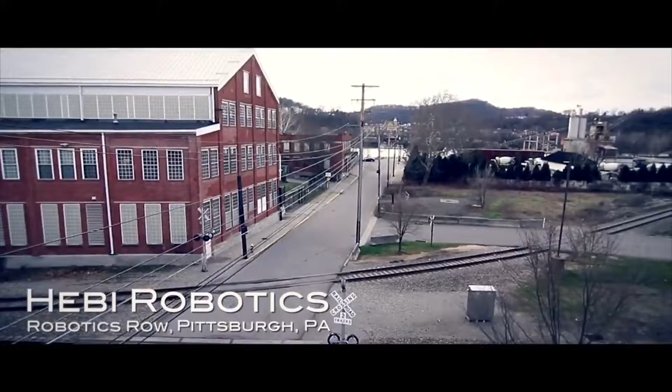My name is Howie Choset. One of my motivations for participating in the start of HEBI Robotics was to keep the band together. And in 2014, we started the company.

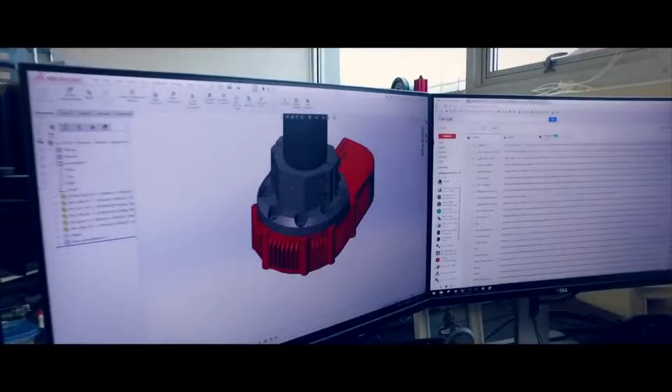I was introduced to HEBI as I was pursuing my MBA at Carnegie Mellon's Tepper School of Business. I became employee number one after the founders. We're known as the Snake Lab because the thing we're most known for is making snake robots. And in the process of making these robots, what we wound up doing is making modules. It was those modules, those actuators, which we can put together almost as if you're playing with Lego, that really let robotics experts move much more quickly and do things in the real world that they weren't able to do before. That's really what HEBI Robotics is about.

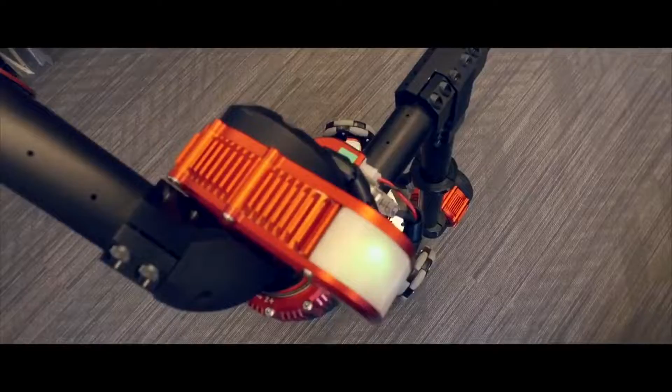We want to accelerate the development of robotics by endowing developers with the ability to put robots together in a relatively short time and not have to worry about all that low-level crap that you have to deal with when putting robots together for the first time.

That's where our hearts are. We're saying, how can we speed up research across the board and go back to the field more quickly. It's a robotic actuator that enables you to build new and different types of robotic mechanisms.

You kind of have an idea of what you want to build, so you need these parts that will speed up your process. And just like Legos, it's a kit that you can start with, and then you can take apart and change, modify, and make more exciting in different ways—either pre-assembled or with instructions for how you can put together a fully working robot.

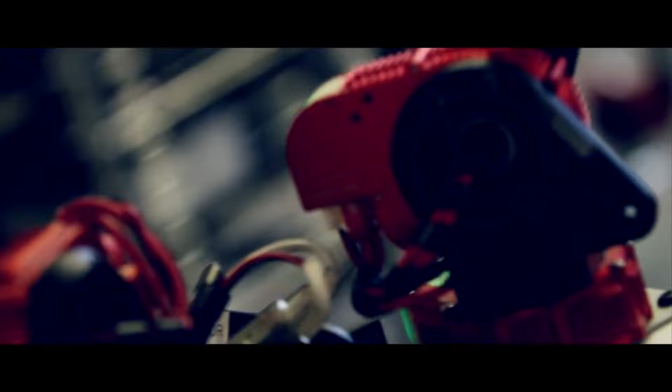Here's code to give you a starting point. It says, okay, what are people going to do with this? If we enable them, if we provide the tools, what will they think of? All the developer has to do is focus on the creative innovation.

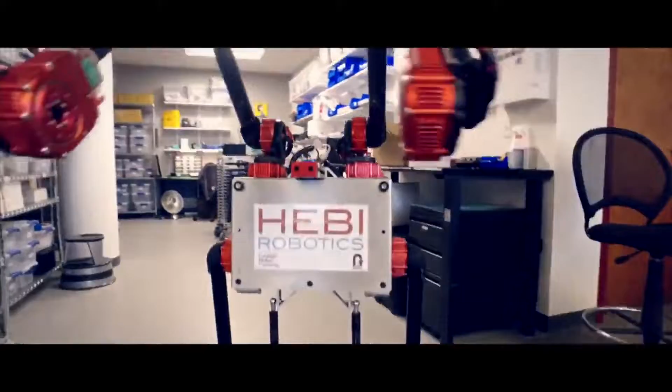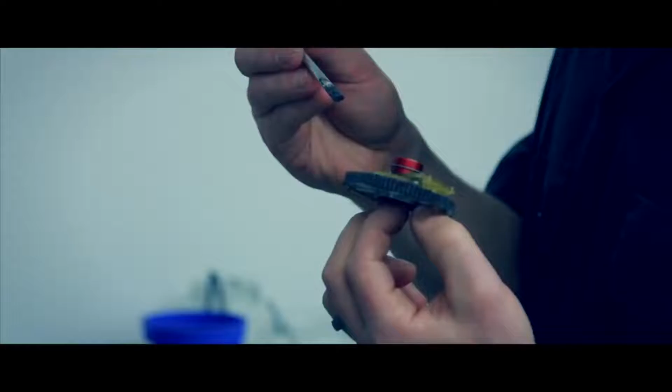We also provide custom development. We can very quickly, using ideas from modularity, go in and build customized robots in small quantities of 10, quantities of 50. HEBI Robotics is going to have a future in making a large variety of customized robots, perhaps as quickly as people who mass-produce systems today.

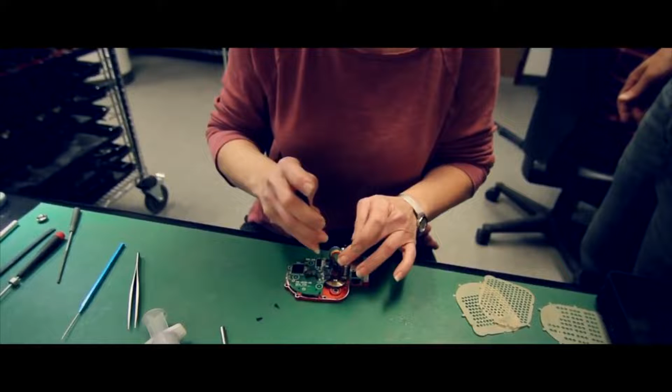What we have today is a system that makes it possible for the roboticist, the robotics expert, to create world-class professional-grade robots quickly. We would love it if we could enable someone that does not have a PhD in robotics, that's not coming from academia, to actually build and program a robot.

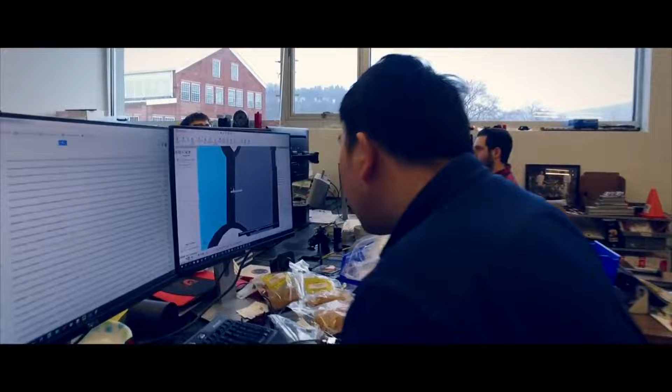We want to make working with hardware as easy as working with simulation, so that the robot builder can focus on the more creative, fun aspects of building a robot.

It's the people who made these robots great. Robots aren't great, robots are just tools. And my hope is that we at HEBI Robotics stay together for as long as possible.

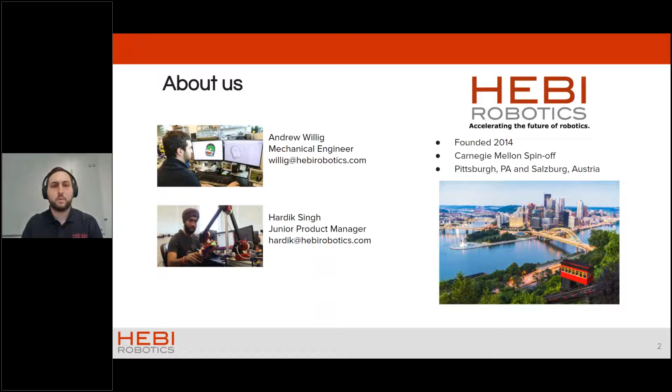So what can you expect from this webinar today? Firstly, we are going to go through the HEBI Robotics approach. What are we trying to accomplish with this HEBI Robotics platform that you're going to learn about today? Next, we'll show you how customers today have already applied our technology successfully in their own work.

And then we'll do a deeper dive into the platform itself, talk about the hardware and software overviews. You saw some of that in the demo and in the video. And then also talk about the tools that we have to help guide you along the way in using all of that hardware and software.

And then lastly is the fun part, right? The demos that we just did a teaser of. We'll do low-level demos, show you how to get up and running with individual parts, and then also at a kit level, how we have all this example code to get you up and running. And then also, we'll play a fun little game of remote tic-tac-toe between me and Hardik.

So that's what you can expect to gain from this webinar. What do we want you to learn and take away? Well, first, what the HEBI platform does. Why is it so great and so versatile? How can your industry or research benefit from using it? So maybe you have a project in mind already that you can apply our platform to.

And lastly, if you're a current customer, are you utilizing all the different services that HEBI Robotics provides? Are you making the most out of your experience? And then lastly, I'd like to remind everyone to please use the chat box for questions to ask us, me and Hardik. We'll get to those - if we don't answer them when we get into the meat of the presentation, we can answer those live too.

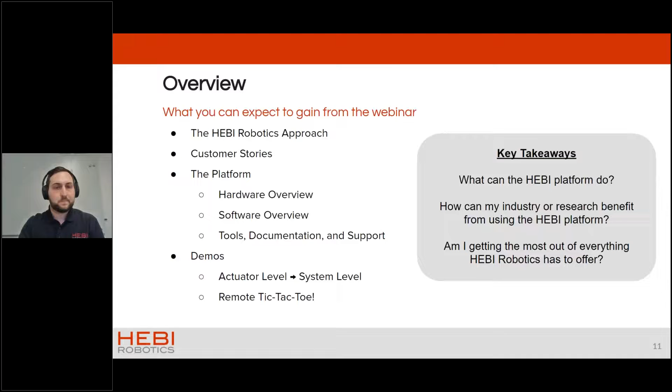So in today's world, building robots is very difficult. It combines a variety of hardware and software engineering disciplines where your options are either to build robots from scratch, where you have to fully customize from the ground up, and this is very costly and time consuming, or the other option is to purchase standardized hardware where you're buying something pre-made that typically lacks the versatility your application calls for. So you're really buying a one and done solution, and once that project is completed and it's served its life, it's just going to sit on a shelf.

What we here at HEBI Robotics have created is an agile platform for robotic development in order to accelerate the future of robotics. We want to make building robotic systems simple, useful, and safe. We want to make both robotic experts and novices able to design, build, and actuate tailored solutions for any application your imagination can think of.

We want to keep this process cyclical too, so that when you're done with this specific project or that specific solution, you're not putting that robot then on that shelf. You can now reconfigure it or reuse it for another application.

So in order to have a successful solution, you need reliable technology. HEBI's platform utilizes modular reconfigurable hardware. You can recreate it with embedded sensors, so you can do a variety of different control and feedback from that technology. It's also mechanically compliant, and we'll talk about that later.

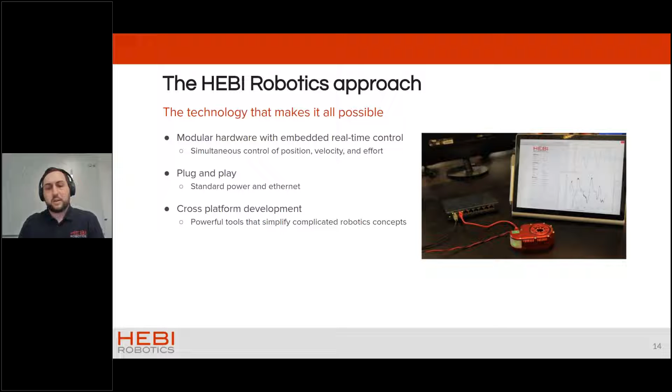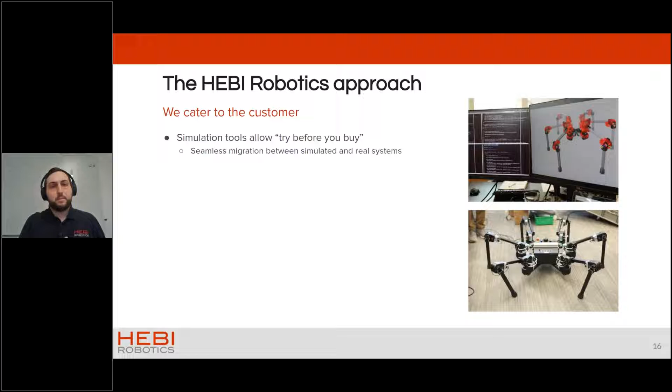On top of the reliable technology, we do everything we can to cater to you, the customer, so that you can get the most out of our hard work. This includes simulation tools so that you can try before you buy, as we like to say, so that you can run all of your software development beforehand, before you actually have physical hardware. But then when you get that physical hardware, you can run that exact same code that you ran in simulation on the physical hardware.

You can also get up and running very quickly by buying individual piece parts and then putting them together into your own design. Or we also sell pre-configured kits with loaded example code that I'll dive into later in the presentation. But we also do custom development. We work with customers to create new technologies, leveraging the concepts built into our hardware and software.

And then lastly, something we're experimenting with is kind of like a Netflix style subscription plan, kind of like the old school Netflix, where you get access to a couple different DVDs. This helps, as I'll explain later, when you're having trouble picking which HEBI components you want and you're not exactly sure. This gives the subscriber access to some quantity of hardware, and then you can swap out components depending on as your project evolves or as your needs are more clarified.

On the right, in the next slide, you can see a handful of our customers from around the world, which span both the academic and industrial spaces. And we specialize in helping them do in days what could otherwise take months with traditional hardware. We take care of all those low-level aspects of robotics, as Willig mentioned. Putting together the electronics, mechanical hardware, and software, we've already taken care of that for you.

Over the next few slides, I will show you some of the ways in which our customers have used the HEBI platform to develop all types of robotic solutions. In particular, I will be highlighting how HEBI's Agile Robot Development Platform has allowed them to move faster, more easily.

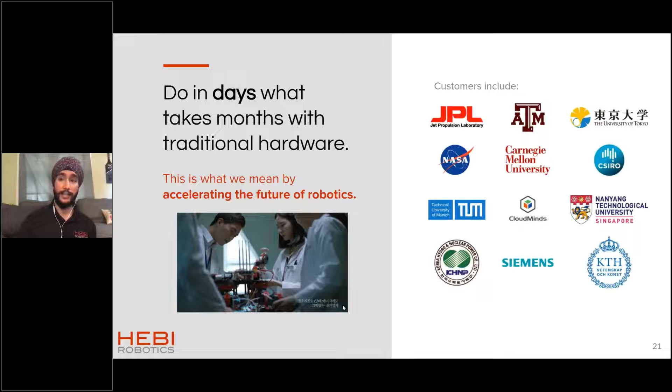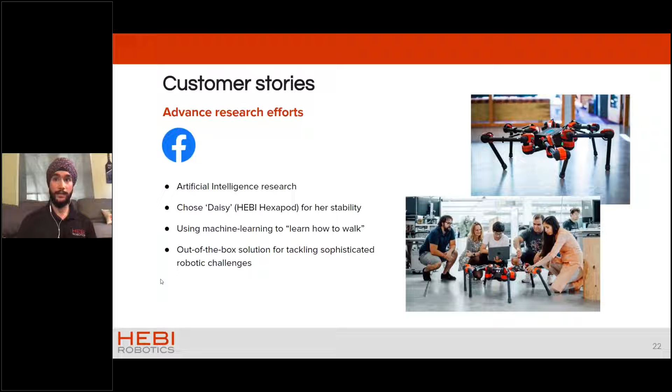First up, we have a research group at Facebook. This is an example of a customer who used a HEBI robot as a jumping pad towards sophisticated AI and machine learning research into robot locomotion. What's important to note here is that they started with a stock pre-designed HEBI kit, known as our HEBI hexapod, or DAISY, a nice name that we've given to it. They wanted DAISY because they needed a stable platform that had the ability to walk, but they wanted to investigate and research what the best way to make that walking happen was. They did not need to design a new robot from the ground up, and so our kit provided exactly that starting point that they needed, so that they didn't have to design it from the ground up to do that groundbreaking research. This is one way in which our stock kits are a great starting point for many of our users.

Next up, we have another research group at Google DeepMind who was tackling some similar issues, but had some key differences in how they did that. They were also tackling reinforcement learning research for legged robots.

They were attracted to the low-level control access of the HEBI platform, meaning they could customize the robot more. Using the same hardware, they created different types of robots, which goes with the Lego aspect of our platform, including 4, 5, 6, 3, and 2-legged robots all from the same hardware.

They were able to first create these robots in simulation, test them there, and then build that exact same robot in the real world. This was an example of a customer who took our stock hexapod kit and adapted it to their needs, and that customization is key to the platform we provide.

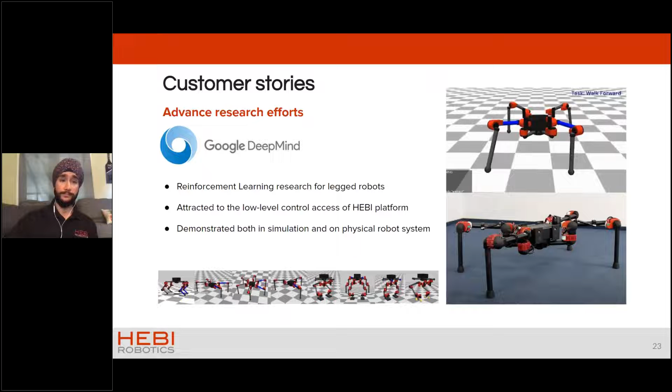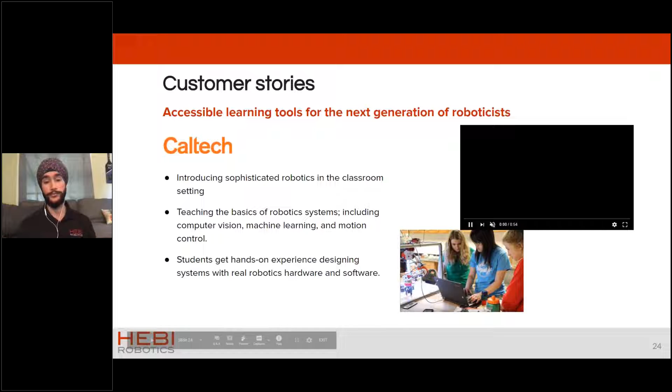Finally, we have a different example: with the same power of modularity and configurability, our tools become accessible learning tools for the next generation of roboticists. We were able to introduce sophisticated robotics in a classroom setting with our tools.

As this video plays, you'll see a robot that can toss a table tennis ball with accuracy. It can play Connect 4, and you'll see this in a second. It can also flip, as shown in the famous bottle flip challenge that became popular on the internet.

These robots were all built by students being introduced to robotics for the first time. Given this hardware, they had freedom to build, which allowed them to learn the basics of robotic systems, including computer vision, machine learning, and motion control—all aspects you can integrate into our platform very easily.

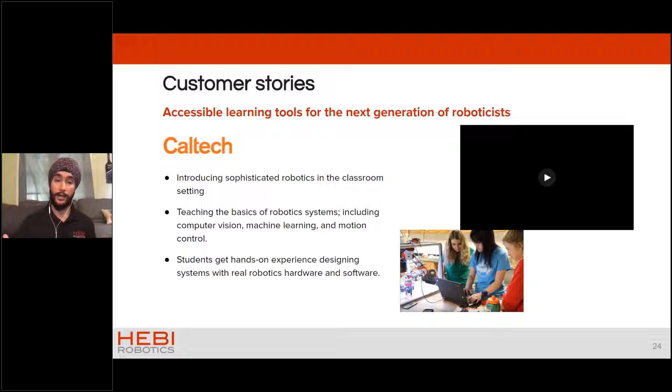Students were able to get hands-on experience designing systems with real robotics hardware and software. What we really like to emphasize is that students using robots for the first time created real functioning applications in just 5 to 6 weeks. This hardware is used at academic institutions in the US and Europe, showing how powerful our tools are—easy to use both for robotic experts and for someone brand new to robotics.

Beyond providing powerful robotic tools, HEBI Robotics also has in-house expertise and infrastructure to quickly expand our catalog with the same hardware and software to better suit customer needs. We can use our own platform to create custom developed robotic solutions for unique applications, and provide consulting services where we work with industry partners to advise on and develop systems that efficiently and safely integrate robotics.

For the same platform, we have the qualifications and experience to take a solution from prototype to scalable production level, including using our own in-house production team. In summary, we are the experts at using our own tools for development, meaning we can get everything done under one roof so you spend less time building a system from the ground up.

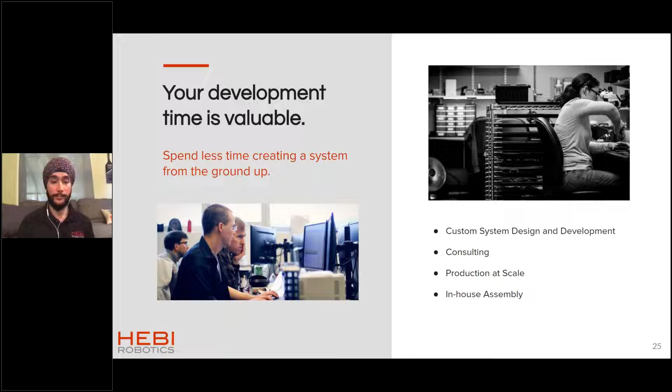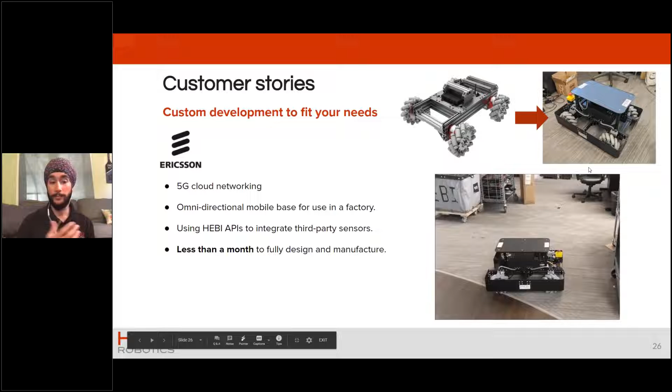Let's look at two quick examples of how our custom development can speed up your robotic solution. We had a group at Ericsson approach us with a specific need. You see two robots with an arrow between them—the one on the left was what we provided at the time, an X series robot. We'll talk later about what X and R series are.

It was a mecanum base they saw and said, this is close to what we need, but not exactly. After they gave us certain specifications, we created the robot on the right—the one you see moving around—which had additional sensor payload, additional rigidity and structure, and used our R-series modules, which are waterproof and dustproof.

They were able to continue their work by providing us the additional specifications they wanted. With this new platform, it took us less than a month to fully design and manufacture this new base for them.

So we can act quickly, we can go with your specifications, and it makes it possible to also integrate LiDARs, cameras, other sensors, which is what our custom development can make possible for you. This is an example of where something we have was close to what you need, and we can adapt it to what you really need.

This next example takes that even further. We are able to create systems that have real world impact and also expand our hardware and software solutions available today. In this case, we worked with subject matter experts at Chevron and other groups to create a uniquely tailored solution for industrial inspection.

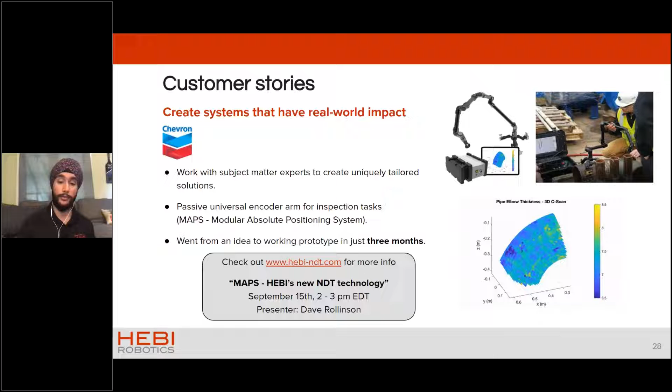Putting all of those customer stories together, with HEBI Robotics, I want you to leave here today knowing that you can dream as big as you want. Whether it's starting with our base actuators and modules, getting rolling with a stock kit, or creating your own novel solution to a robotic challenge, we've got you covered.

Just to highlight some examples, the images on the right show: the first is a 7 degree of freedom arm using chopsticks. The next shows a robotic backpack that helps support heavy objects, which you can wear, built with our technology. Finally, the last image is a tensegrity structure ball that can roll by itself.

These are robotic applications made possible with the platform we've created to be modular, configurable, and to bring into reality the kind of solutions needed to bring robotic automation into the commonplace. We make it as easy as possible to build anything from a traditional robotic arm, to a 6-legged heavy hexapod like a spider type robot, or anything else you can imagine.

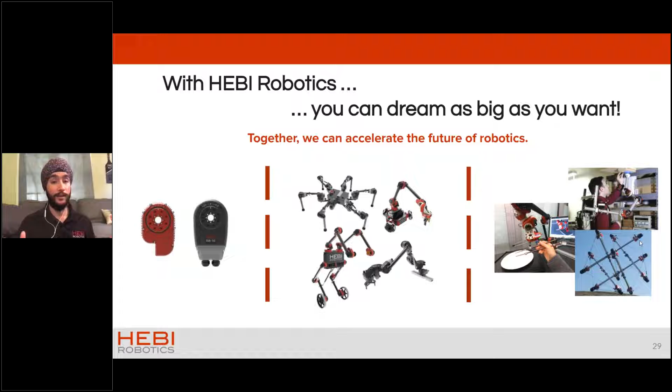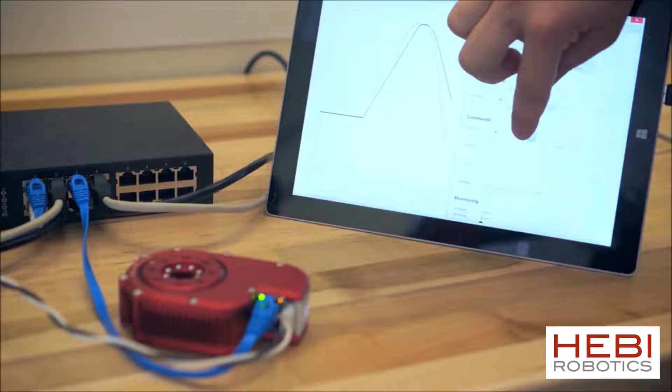Here's an introduction to an X series actuator. Like I said earlier, these are very easy to get up and running. Here you see it's standard Ethernet and power to plug in. There's lots of sensing built in, so you can do simultaneous control of position, velocity, and torque, and even more. You get feedback, and you can even send commands back and forth.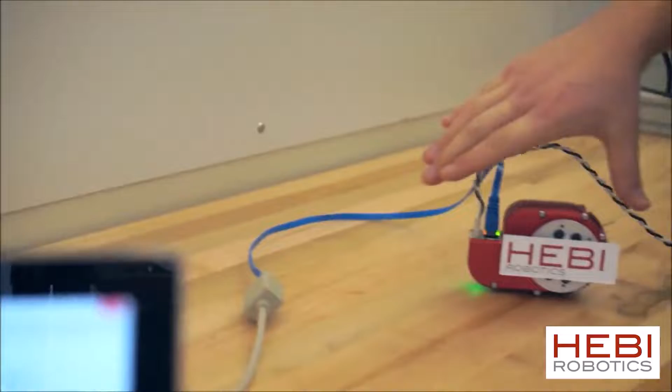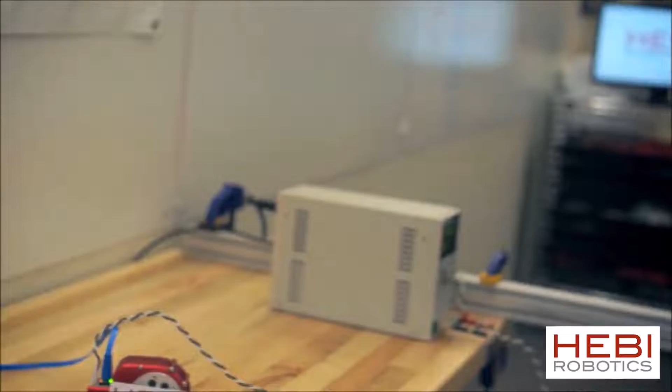Beyond that, there's built-in IMUs on every actuator, so you understand the orientation and where gravity is. You get accelerometers and gyros. It's also on the network, so you can use other sensors on the network, like IMUs in your phone. Here, as he takes out his phone and rotates it, we're reading the velocity from the phone's IMU and forwarding that feedback and sending commands to the actuator.

The APIs have built-in tools, so you can handle dynamics and smooth out the commands to send trajectories. So those commands are now trajectories and smoothed out.

The actuators are also series elastic, meaning they're mechanically compliant. So you can do force sensing, but you can also command a force. As this arm spins around and he interacts with it, they're almost like shock absorbers, so he's not hurting the actuator and the actuator's not hurting him. He's able to interact with it.

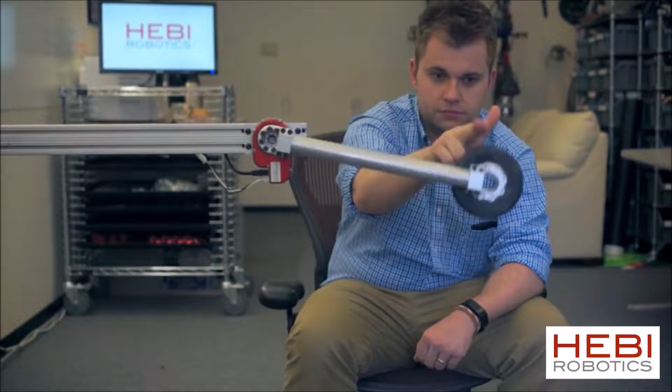And then finally, as this video comes to a conclusion, there's a nice big reveal that the whole thing was shot on a 6 degree of freedom arm built out of the actuators. Ta-da!

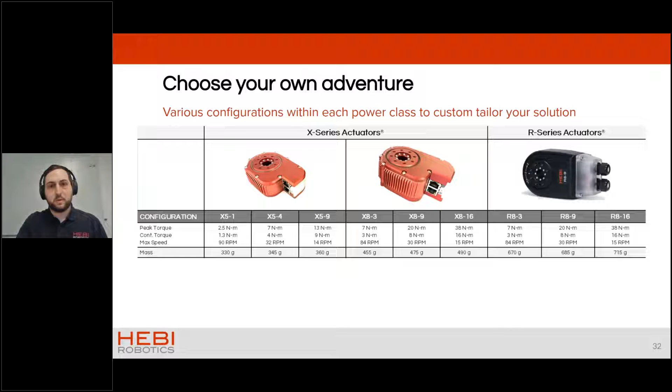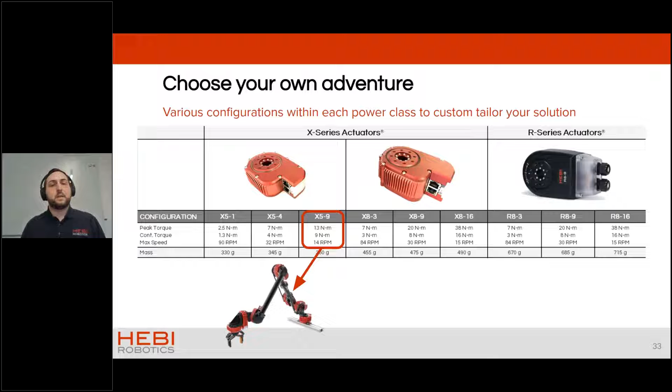For example, if you want to use an X5-9 actuator, which is the highest torque actuator in the X5 power class, this is a great actuator that we use all the time for our gripper spools on our robotic arms, because you get a lot of torque out of it to grasp objects, but you also limit the amount of additional weight that you're adding onto the arm, since it is kind of the lighter of the weights in between the X5 and the X8s.

Whereas with the X8-3, you kind of jump up into the next X8 power class. These are great for wheels because you get high power, but you also get that high speed, and you don't necessarily need as much torque. We use these in our mobile base kits, and we even use these as the wheels for our self-balancing robot Igor, as shown in the image below.

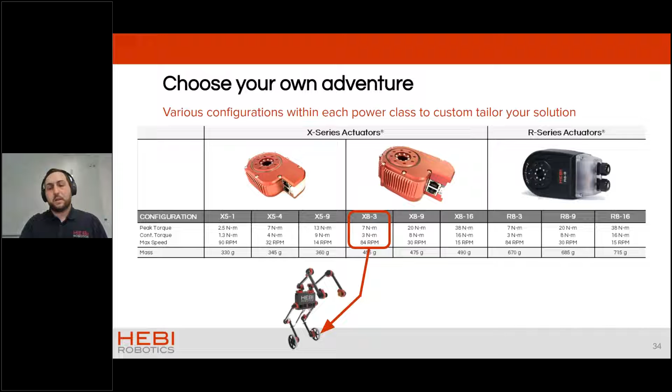In addition to the actuators, we offer all of the accessories that you would need to build and configure your robot. We want to make building these robots as easy as building with Lego. We provide an assortment of accessories such as brackets with generic mating features that make connecting actuators quick and simple. There's even hollow tubes with indexing holes that mate with these brackets, which helps keep wiring clean, and it also ties into the software and the kinematics.

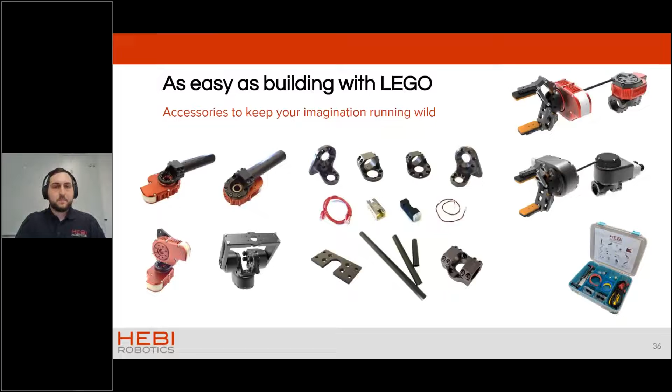In addition to the individual components, we provide pre-designed and assembled robotic systems that we like to call kits. These can be configured to custom specs and also come with preloaded code that helps you get up and running right out of the box.

I'm also going to show off our robot builder website here right now. So I'm going to step out of the presentation and demo the robot builder, and we can take a second or two for some questions.

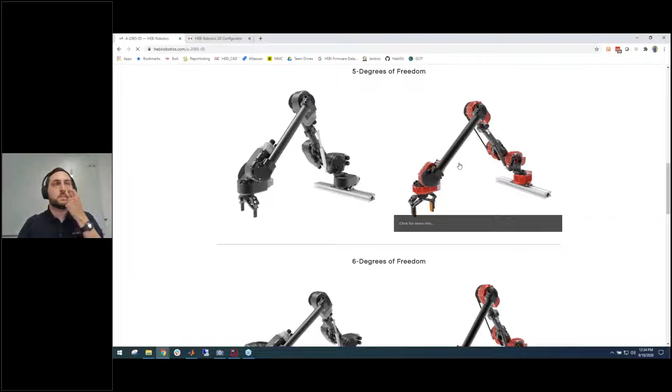So that would load up. And then what you can do here is you can see all the different specs for a 5 degree of freedom arm with or without a gripper. And at the bottom of this page, all the documentation for how to build one, the data sheet, HRDFs that we'll talk about a little bit later. But then also there's this button to configure your own.

So what that link would bring you to, and I've pre-loaded it here, is our HEBI robot builder. What you can do here is you can start from scratch, or you can upload your own HRDF to create your own robotic arm. So I'll show this real quick. I have an X89, an X89, another X89, an X51, and an X51.

And then if I go over to this test drive tab, you can see this continuous payload right now in its current configuration is about 1/4 kilogram, peak payload 2.5. But what I can do, and I can move this around slowly, see what the kinematics kind of look like, and see how that payload changes.

But if I'm looking at this and I'm like, I could probably use a little bit more payload, you can go back into the build, come back to the shoulder, replace that shoulder joint, and come over to the sidebar, replace it with an X816, and just readjust. What I can do now and see that the payload has increased significantly, and I can drive it around. So that's one way to reconfigure your robot, by just the configuration of the actuators themselves.

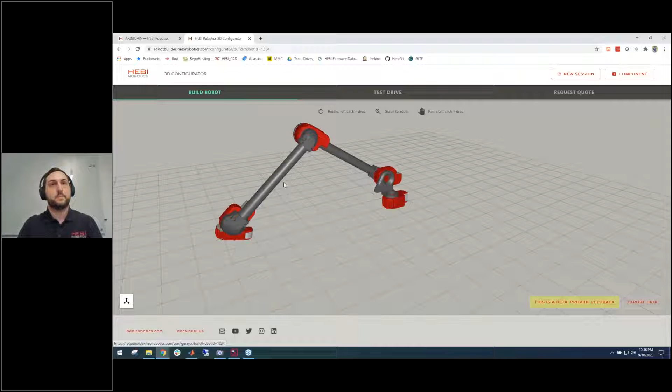Switching from an X89 to an X816. Additionally, what you can do is you can change these links. So I could change the link too. If I want that further link to be a little bit shorter, maybe I want the twist to be a little bit differently to change the kinematics of how the arm moves, I can do that. And then I can go back to this test drive and drive it around, and you can see how the payload and the kinematics have changed.

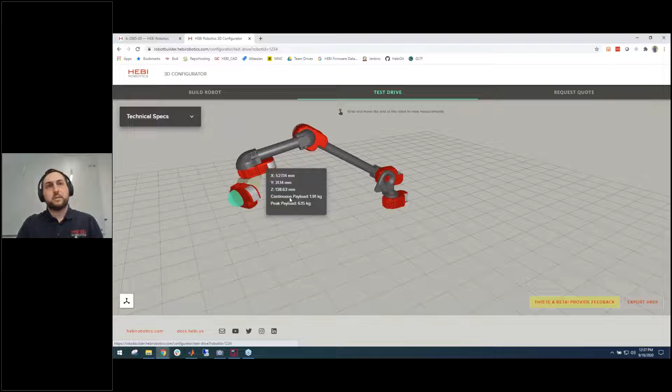And then finally, when you've found your final configuration and you want to get a quote for this setup, you can come over to the request a quote tab here, and you can email us and it will send us exactly that configuration that you want, and we can send you a quote back as to how much that costs, with or without us assembling it for you, and get you going from there.

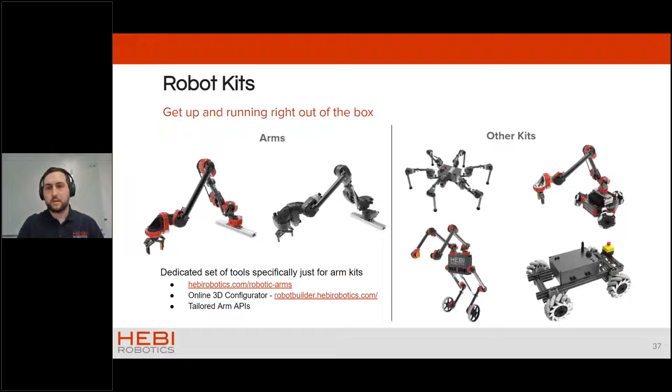Hardik's going to talk about that in just a little bit. All right, so I'll continue on. Lastly, on the hardware side, we have this piece of hardware called the HEBI I/O board, which we created to act as the bridge between our APIs and low-level third-party sensors. It's an Ethernet-enabled device, so it's easy to network and daisy chain along with the actuators within your system. It provides analog digital inputs, digital and PWM outputs, encoder inputs, and more. There's even an IMU on board, so you can get orientation estimate readings from this as well as the actuators.

You can see here there's a list of various applications or example uses for this I/O board, one being controlling pneumatic valves. So if you didn't want to use our cable actuated gripper, you could set up something like a vacuum gripper on an arm and control the pneumatic valves with this. I do want to note, however, this is not a motor controller for the actuators. The actuators themselves have all of the control electronics built into them, so you do not need this I/O board to control the motors, the actuators themselves.

Additionally, you will need some kind of computer, an Intel NUC that we use in our kits, or something like a Raspberry Pi, to control your system. This is also not a replacement for that. And with that, to talk about the software, I will pass control back over to Hardik. Hardik, control is yours.

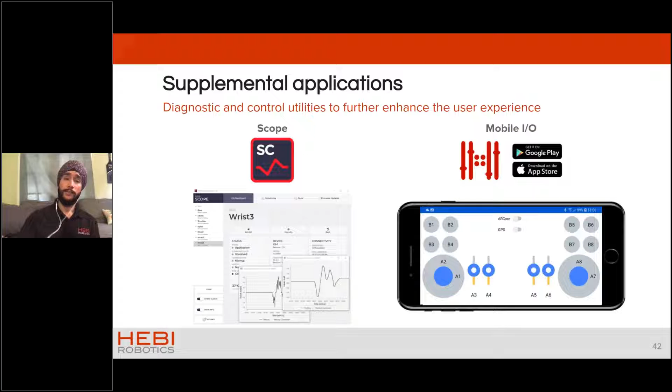Continuing with some of the different tools that we have that make it easy to control your robot, we have some cross-platform software tools that simplify the otherwise difficult task of sophisticated motion control. First up, we have the HEBI robot description format. This is an XML style format that stores robot configurations, including kinematic and dynamic information. The useful part about HRDF is that it's API agnostic, but also robot agnostic.

Switching over to the robot agnostic part of the thing, it makes it easier for your code to be changed. So if you've created code for a 6 degree of freedom arm, but you want it to switch over to a 5 degree of freedom arm, to pass that kinematic information to your code, you just need to change 2 lines in your HRDF.

So again, it makes it very easy in terms of passing that relevant information into your code. You don't need to change or recompile everything.

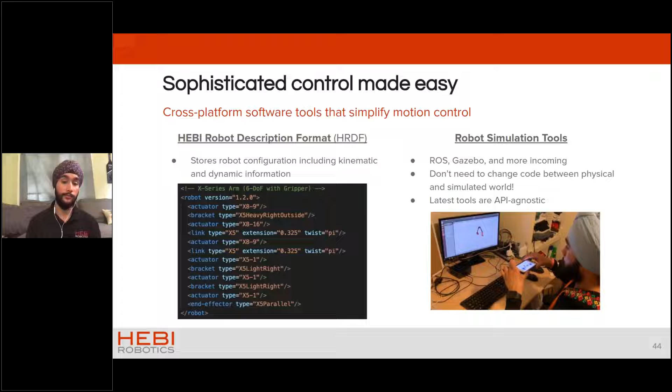The other thing I'll mention is that both these tools are actually free for you to look at right now, and I'll talk about that in a moment with our documentation. You can find our HRDFs online on our GitHub, and the simulation tools are also on our GitHub ready for you to download and use. So if you have any doubts about whether the robot is the right choice for you, you can download these tools right now, give them a try in simulation, and talk to us. We'll help you figure that out.

Your first best friend is going to be the example code that we have up. We've made an effort to ensure all 4 of our APIs have the same example code that helps highlight our features and simultaneously shows you how to implement them. We had a question earlier in the webinar about where this example code can be found, and this is on our GitHub, at github.com/HEBI Robotics. That GitHub page can also be referenced from our documentation page, which I'll talk about in a moment. The example code is a really useful starting point, and we highly recommend you get started here because it allows you to really get familiar with the hardware and operate at a point which we know works for you.

Your next best friend is Scope. As I mentioned earlier, it can really be an invaluable tool when it comes to development, and especially when used in tandem with our APIs or example code, we highly recommend you always have Scope open and use it as your best friend whenever you need to figure out what's going on.

Awesome, thanks Hardik. So quickly, I'm going to run down what you're going to see in the fun part of the webinar. Let's all take a deep breath—that was a lot of information, very broad. So here comes the fun part.

Today we're going to take you through everything from the small single actuators I've got here, how you get started, show you some live feedback and commanding with the ability to log that feedback, and show you a quick series elastic force sensing demo, just to show that force feedback and commanding force through these actuators.

And then at the system level, we have arms, as you saw in the teaser at the beginning of the webinar. I have one here in the office, and Hardik has one at his house. We're going to show examples of visualizing the kinematics of the arm, some simple gravity compensation, collision detection, a simple Mobile IO and waypoint teach-repeat, and then we'll have some fun at the end and play tic-tac-toe between the two of us.

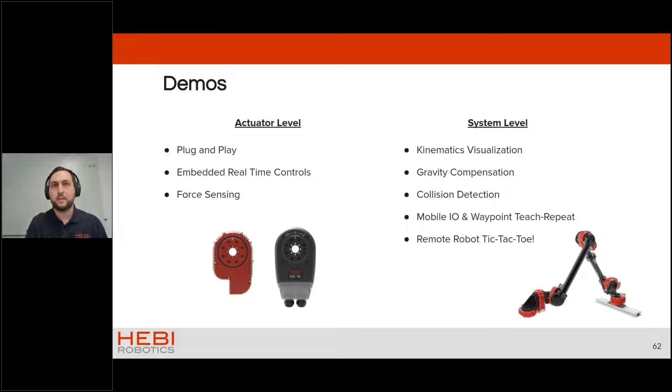So with that, I'm going to exit this presentation, and I'm going to stop sharing my webcam too so you can see this.

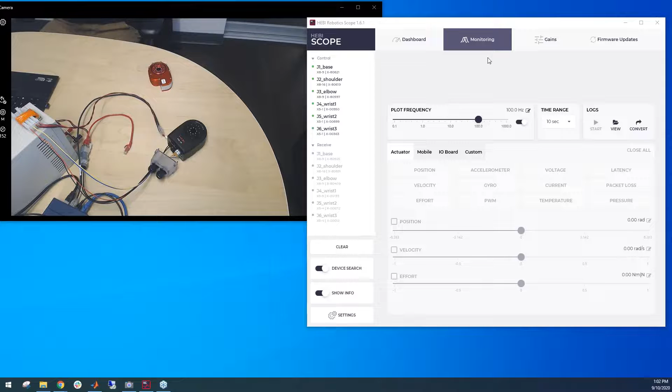Right now I have an X-series actuator here, an R-series actuator here, and I have Scope open. This left column is where you'll see all of your modules, as we like to call them—whether it's an X-series actuator, an R-series actuator, a mobile device, an I/O board, anything on the network shows up in this column.

What you can also do is group them. Right here we have Hardik's arm, actually VPN'd into the office. I can see that his arm is under a family group called Control, and each of his modules has a name, so I can look at the latency coming across and see the feedback I'm getting from the modules of his arm. Don't have to dive too deeply into that.

But now, like we showed in that video at the beginning of the platform, with my power supply off—just to protect from hot-plugging any actuators—I can simply plug in power and Ethernet into this X-series actuator.

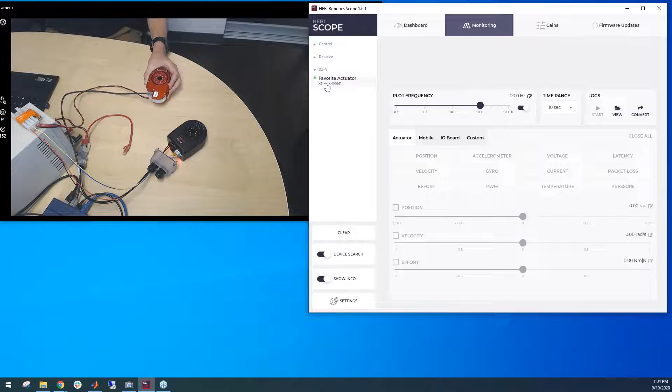As I turn power on, you'll see both actuators power up because I also have the power plugged in for the R series, but the Ethernet's not connected, so you'll only see this X series pop up. I can also show you that this arm I have in the office is also showing up.

You can go in here and change the name of this actuator. So I can call this demo actuator. You can get various things of feedback. Right now I'm running at 100 Hertz of feedback, and this is the position feedback, and also velocity feedback.

So I can plot and get this command, this feedback, live as all this is happening.

You can get feedback from the actuators, but you can also command position, velocity, and effort. If I bring this up closer to the webcam so you can hopefully see this, and I drag this position, and click along this slider, you'll see the actuator rotate, and in that plot you can see it commanding to different positions. In the same vein, I can control the velocity and make it go faster in one direction or the other.

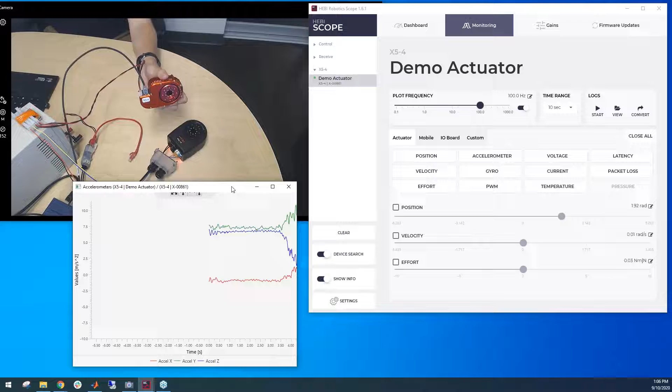If I close those plots - as we said, each of these actuators also have IMUs, so there's accelerometers and gyros. If I hold this kind of vertically with the y-axis, there's actually markings on the back so you know which axis is which direction. You can see here the green line is the y-axis, pointing up right now. I can rotate it 180, and now you see that y-axis is pointing down, and so on and so forth.

So there's a wealth of different things you can do here in the monitoring tab of Scope. I forgot to mention, there is this dashboard tab in Scope that gives you all your status of whatever actuator you have selected, some more device information, and then the MAC address, IP address, connectivity things along that nature. I won't get into these other tabs, but you can set gains.

We're also constantly doing firmware updates. So if you're working, maybe a year down the line, with an ARM or something like that, and you open up Scope and refresh and see a firmware update, that just means we recently updated the firmware because we're always trying to update our technology and make it great. One day maybe we'll do a webinar focusing just on Scope and all these different features, but I'm going to keep moving on.

As I mentioned, these are daisy chainable. So what I'm going to do now is plug in this Ethernet cable to the bottom port of this actuator. The R series actuators are still using the 100 megabit Ethernet, but it's actually over fiber, so you can see there's a fiber cable going into this R series actuator. But we have this Ethernet media converter, so I'm converting that Ethernet to fiber. And then as I turn the power back on, you will see both the X series and R series actuators show up. And there it is.

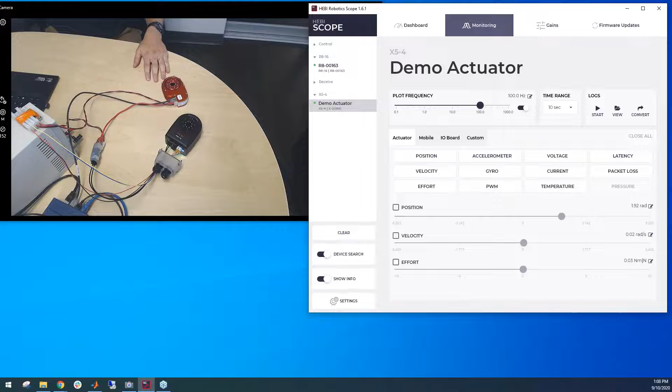So that's the actuator demo. I'm going to set up my little force sensing demo, and while I do that, we can field some questions.

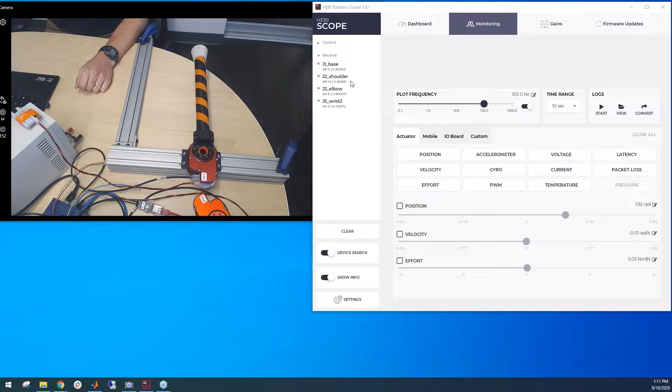All right, so now what I have set up here is an actuator with a little link on the end of it. And again, I'm going to turn on the power. And we will see it show up in Scope. So here it is, my X8-9.

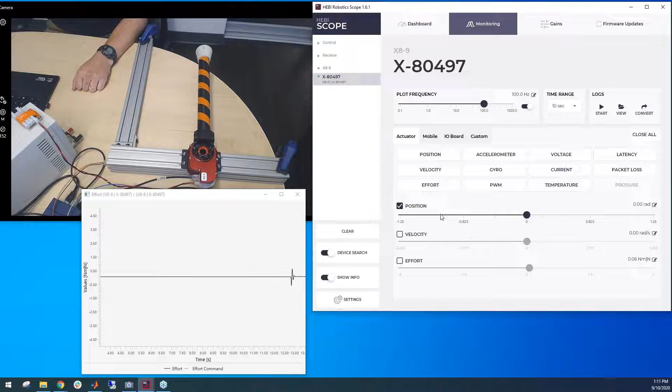So what I can do here is plot the effort, as we mentioned before, these are series elastic actuators, and I command a zero position. I can now apply a load to the end of this lever arm, and you can see as I apply more and more load, that effort, basically torque in Newton meters, increases and increases, and as I lessen that, it goes back to zero, and I can push the other way, and we can get that effort feedback. So this is really great as a tool. There's also that built-in spring element, so you do get some shock absorbing built into the gear train.

Alternatively to getting that effort feedback, you can also command the effort. So what I can do here is go to the effort slider and command a certain amount of effort, and as I resist that effort, you'll see the arm is stopping because I'm resisting that effort.

Whereas if I continue to let it go, something else I've done here is I've set a position limit on the actuator, which is something you can do in the gains tab or in your code. So it's actually now position limited to protect the rest of my setup here.

So if I do a little bit more effort going back the other way and resist it again, it hits that effort threshold because I'm resisting it with my hand. And as I release it, it'll go back. And of course, the gains aren't perfectly tuned with that position. And again, it now hit that limit on the other side.

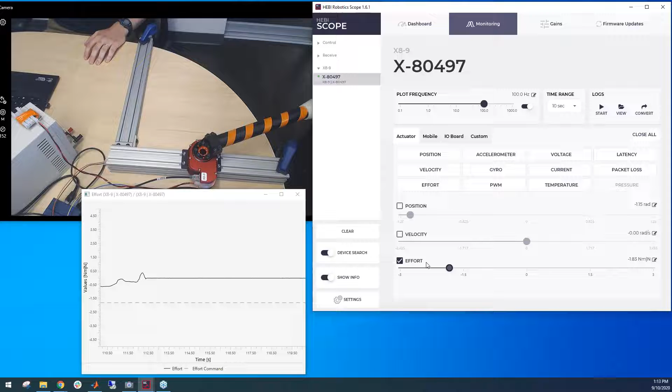So with that, I'm going to end the actuators part of the demo, and I'm going to play this quick little video as I set up the arm part of the demo.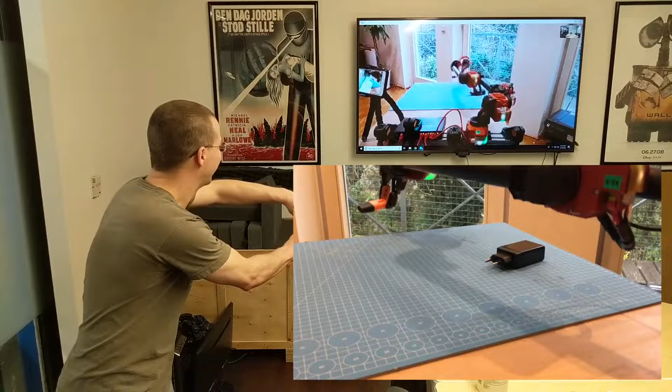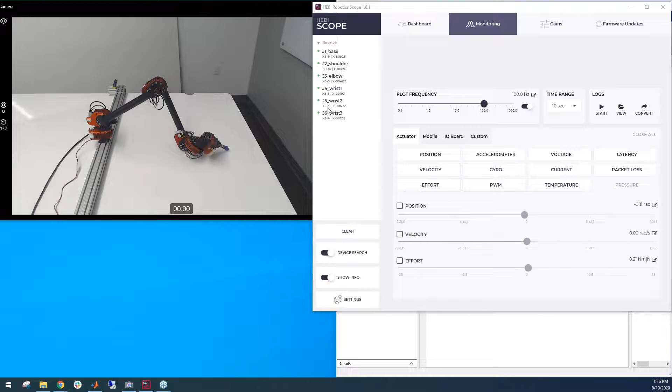Great, so now I have my arm set up here, and you can see in Scope, I have my arm, it's called Receive, and I have all of the joints here in Scope.

So what I'm going to do now is run, as we've mentioned a bunch of times, we have a wealth of example code to get you up and running. So one example of that is this kinematics visualization demo.

And what this is going to do is it's going to read in an HRDF, that Hardik also talked about, that I've pre-written, that lays out each of the joints and links in this arm. And it's going to show you the kinematics of this arm.

And as I move the arm around, you'll see that kinematics visualized in kind of like a live plot. At the same time, I'll also be logging the end effector of the arm, so when I'm done with the demo, you'll actually see that log and those plots live plotted.

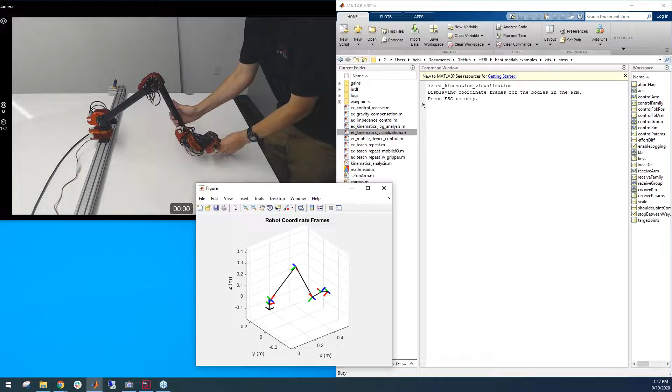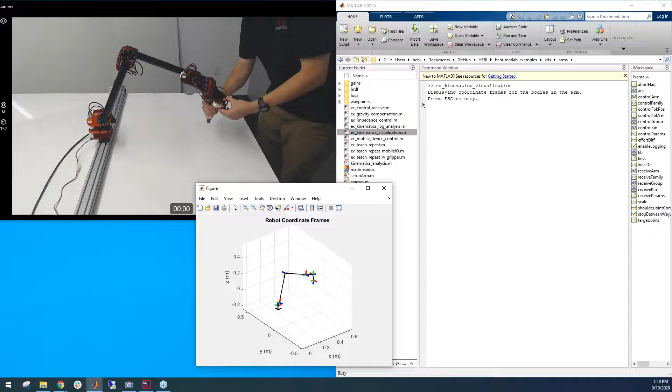So now as I walk over to the arm and I move it around, what you guys should see on my screen over there is basically that graphing mirroring the movement I'm doing with the arm right now. You should see all these black lines and the joint coordinate frames matching everything that I'm doing with the arm. So if I do this kind of side to side motion and come back...

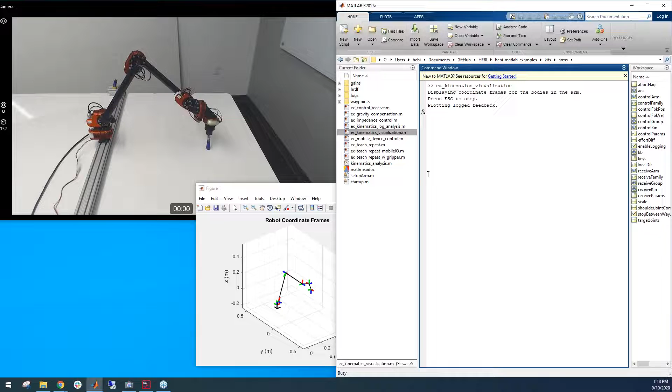And I will now exit, and you can see it's now plotting the logged feedback. And now I'm not cheating, it just showed up on my other screen. We can now see that path that end effector took, and you can see that side to side motion that I took.

And with that, I'm going to pass it over to Hardik, who's going to do some further arm examples and dive into some Python code.

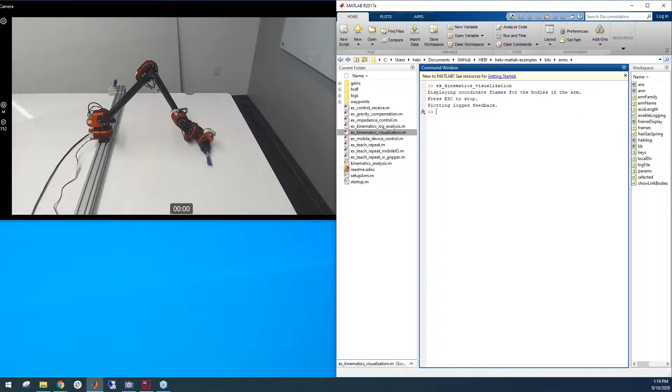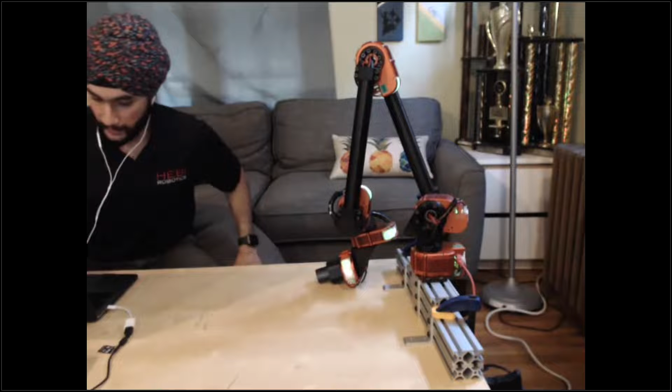Welcome back to my side of the world. As I mentioned earlier, I'm at home, so I am running some things from this side to show just like I can have an arm at home, attaching it simply with a little bit of 80/20 and get going.

So what I'm going to do first is show what we call GravComp, the full version stands for gravity compensation, which means the arm will, so to speak, carry its own weight. When I get this running, another fun thing is that, as you saw, Willig was working in MATLAB, but I'm going to use Python instead to show how you can do the same things on different APIs. And I'll walk you through some code as well.

As you notice, it's very easy for me to move this arm around, which means we are actually torque controlling the arm to carry its own weight. We have from the HRDF file all the kinematic and dynamic information we need to know what this arm is made up of, what the hardware is, what the torque level is at each joint. So I'm not having to put much effort in at all to move this arm around exactly how I want to. This becomes really useful when used as part of bigger examples, which is what I'll do next.

Keep in mind, GravComp is useful, and it's also a really good simple test to see if your arm is running. If GravComp is working, that means you're able to connect to your arm, you're able to command your hardware, and your network is working correctly.

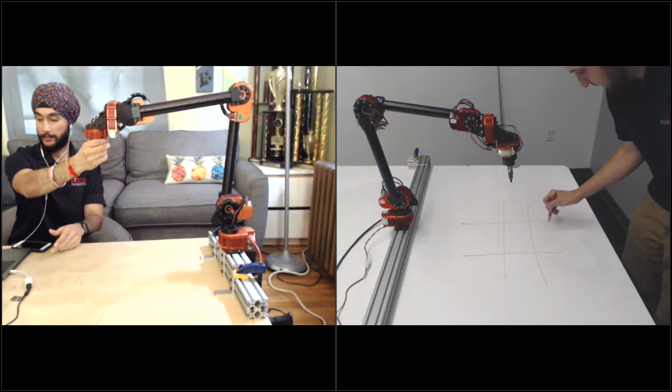Can you see that board in frame? Yeah. Keep in mind, if I draw squares instead of circles or any other shape, that's just me, I'm not very good at shapes. In other words, I'm commanding this through a camera over here, so I may not be able to see exactly what's going on. There's also some lag with that, but we'll just push that arm again, and everyone just notice how my arm is following what he's doing. And I'm going to take that back now.

Thank you. From here, I'm going to make the first move. Let's see, let's go over here.

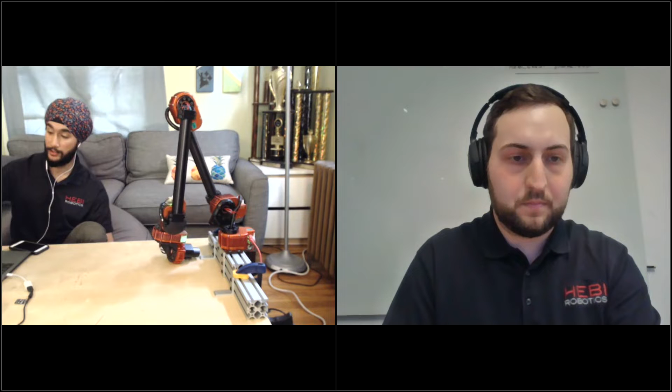But that's really the big demo we wanted to show you that puts everything we've talked about together. It shows very quickly the different features that we have acting at the same time. So I think this is a good way for us to transition back to questions, time to hear from our audience if we can. Please put the questions in the question box, and we'll do our best to answer them.

We just got a question in from Kishore. He said, do you have computer vision enabled on the robotic arms? If not, are there plans for CV enablement? Yep, as of this moment, we don't have any computer vision on the arms that we use today or in any of our prepared kits, but it is possible to integrate different computer vision toolkits. Most popularly, we've seen it done with ROS, but it's totally possible to integrate it quite easily into using those tools with our kits. So we don't have them off the bat, but we can definitely help you get there because we've done so in the past.

While we are waiting for other questions, I should add the question was also, are there any plans for CV enablement? Well, what you'll find is that if you'd like to see something from us, you might find it's on our roadmap, or you could help us add it to our roadmap. So if you have any interesting use cases or projects that you'd like us to hear about, please reach out. And if it's not on our roadmap now, it's something we can add if needed.

For our European folks attending today, Matt asked, are your products CE marked for sale in Europe? And the answer is yes, they are.